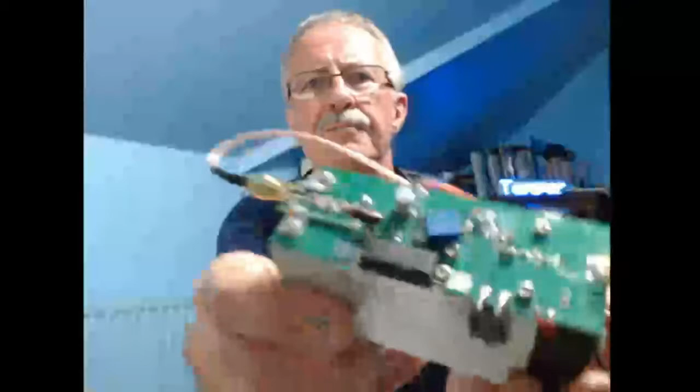Okay, that's about it from the radio point of view, but I would say I've grown some chilies this year that are weapons grade hot. If any of the listeners or viewers would like some, they're called Peach Ghost Jammy. They're a cross, round about 1 million Scoville units. They are insanely hot. I've only used 3 in a big batch of chutney, and it's hot stuff. But if anybody would like one or more, I've got several that I'm never going to use, so shout and message me on the forum, or otherwise private message if you'd like some of those, and I'll pop some in the post.

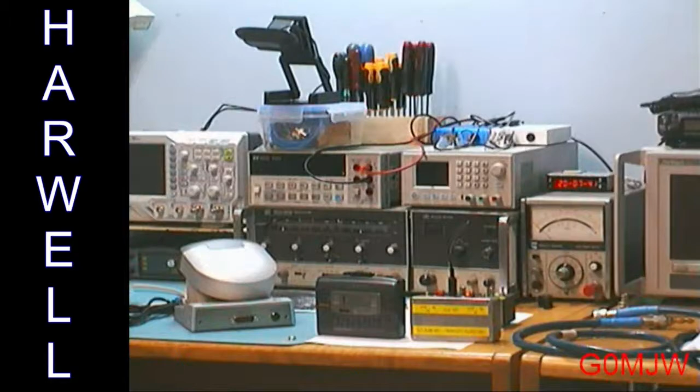Instead of sitting on top of the great big thing that it sat on top of, I guess you can see it panning and tilting and zooming here. And there's the second one. I've got 2 of them.

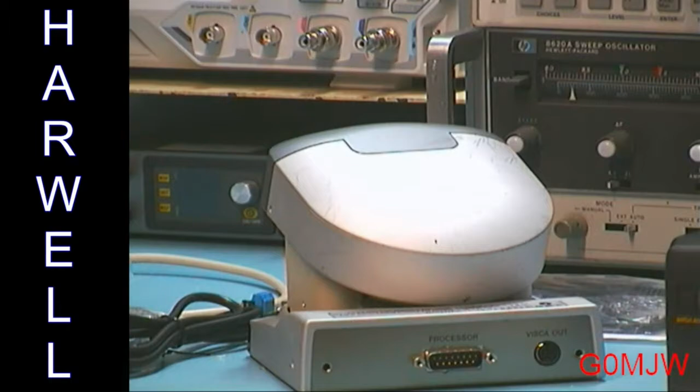This is the Sony camera. The one that is actually looking at that, the second one, is just the same, and it's running off a simple RS-232 connection.

Yeah, I care about the lack of lip sync now. I'll have a go at that in a minute. It's because I've been messing around with things, so sorry about that. But it won't be that bad, at least I hope not. It does depend on what receiver you're looking at it though. So I'll just look at it myself.

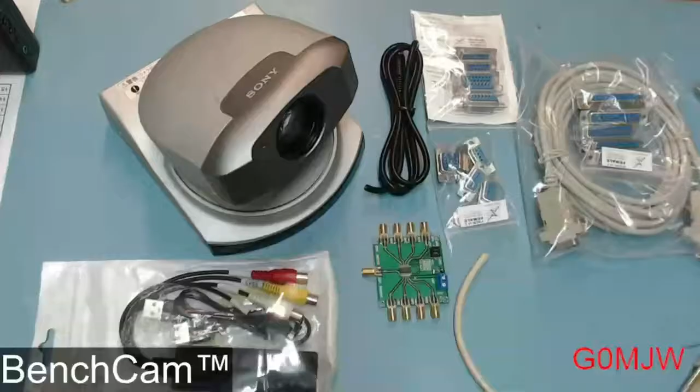I hope not. It does depend on what receiver you're looking at it though. So I'll just look at it myself. Yeah, it is quite a long way out, so I'll restart the thing that generates it. Anyway, never mind that. Because I'm going to show you a picture of the bench, which doesn't have anyone talking on it, so you won't be able to tell that I'm out of sync.

So what's on the bench at the moment? There's the camera that I just spoke about, and the various bits to make it work, which includes an EasyCap. This is not Portsdown compatible yet, but it works fine in Windows. There's an S video lead, an RS-232 interface cable, and a 9-way D-type female, and that's all you need. There are no electronic components required. It really is just a cable and an RS-232 connection, which in this case is my computer.

But it could be something like an Arduino or a Nextion or something else. And the software—I was going to write some software, but then discovered that there's some free software available, which is pretty good stuff actually.

So let me just go back to out of sync me for a moment. And have I got this? No, actually I haven't got it set up, so I can't do that. But I've got a little app which allows me to do all this moving about of the camera.

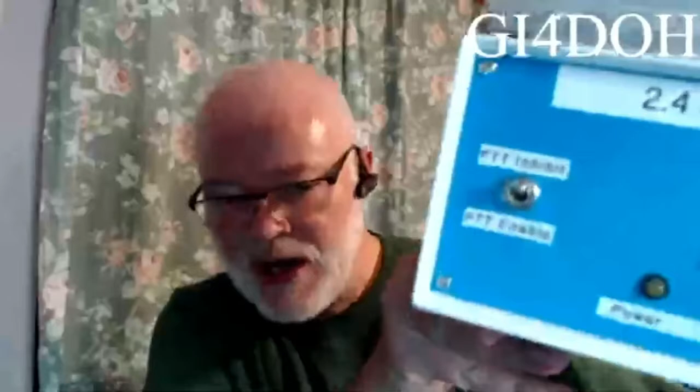Yeah, just trying out, as I talked about, the idea that was suggested to me before about putting a little switch on the front of the amplifier. Is it going to show? Yeah, it just inhibits the PTT until such time as I'm ready to go, so I don't have to click on the start streaming. And I think I comment there about low audio.

Just see if I can bring that, if that's a bit better. Not sure why that should have changed from last week unless I clicked and dragged. That is the other amplifier, not the one that I'm using, but the current one is like it. Just a little toggle switch to inhibit the PTT until I'm ready to go, and then I don't have that little lag before I see myself come up on the screen.

Okay, James, I think I may have accidentally dragged the slider down. I don't think anything should have changed from last week. So that wasn't a major task on either of those.

Indeed, having done the first one, the second one took next to no time at all. Just drilling holes in the front cover without taking everything off and making sure I didn't get any swarf inside was the hardest thing about that. I think just being very careful about hitting the switch and the wire inside. Apart from that, not a lot else.

I've spent a lot of time on eBay. I haven't actually bought a lot, but you know what it's like trying to find things.

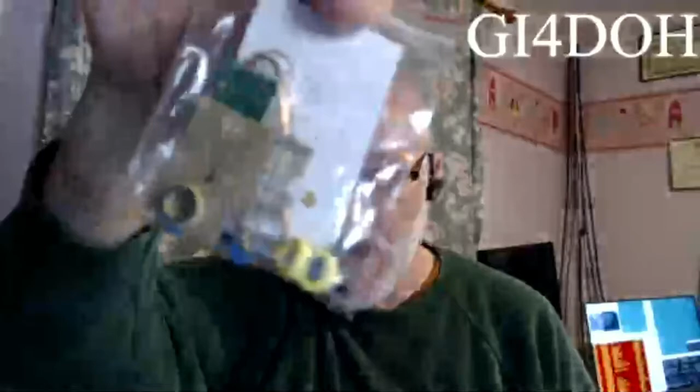Following on from the 10-meter transverter and amplification thereof, I took a look at QRP kits and found they had a little 10-watt linear amplifier, so that's something for me to do on a rainy day. I also went for their 10-meter low-pass filter kit, so that should give me a bit more power out and should be able to drive the big cheap Italian 600-watt trolley if it works, after I get the new transistor I've ordered for that. We'll see how that goes.

Yeah, the Cat 21 thing, got the date in my diary for that, and the activity weekend. I need to see what I can do for that. I still haven't packaged the Portsdown or the Lime as yet.

I have a couple of Hammond boxes on order from RS that should arrive tomorrow, and I'll start putting one of those in. I think I was waiting for the breakout board for the Portsdown for the GPIO boards, but I might just order the ordinary one as it can be modified to do what I want on the other bits, and just get that into a box suitable for going out portable. So enough for me for one round.

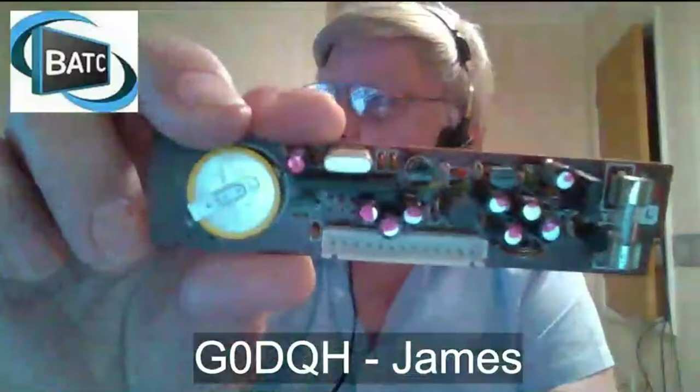Not much to talk about tonight. I've been busy working on the FT290, replacing capacitors on the power supply board, and I've managed, as you can see, to put little spots of red paint on the ones I've actually replaced. Otherwise I wouldn't know where I was coming or going. I can tell you there's so many capacitors in this beast, it's not true.

One of the things I did notice was, if I turn the board carefully around there, when I get it right, along the top on the connector there were loads of cracked solder joints. So that's something to be aware of, I think.

I've also replaced the memory battery as well, and put some of the caps in the receiver itself, but I can't honestly say it's any different at the moment. Some, but we'll get in there, I hope.

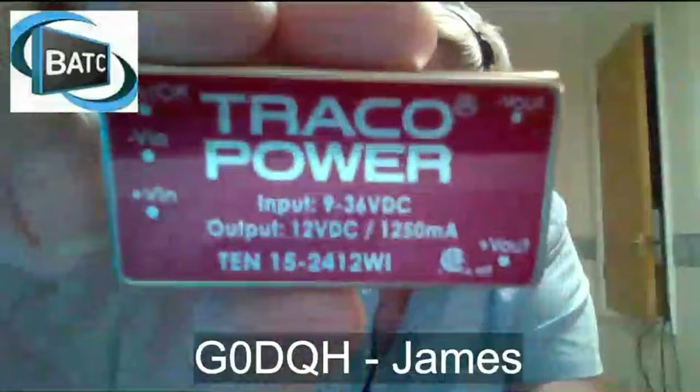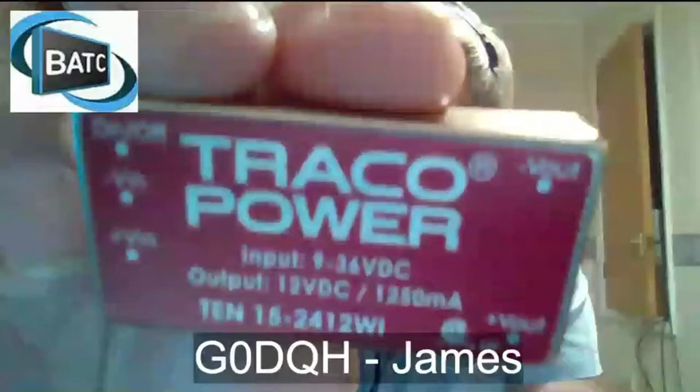The other thing is, if anybody wants any, I still have loads of these. They're not new, but I guarantee they're perfect: 9 to 36 volts in, output 12 volts DC at 1¼ amps. I've got one down in the garage supplying the bias supply voltage to my TX. They're £150 each, by the way, new. I'll put my email address on the web page in a minute, and if anybody wants some, I've got quite a few of them.

Temperature in the garage at the moment, by the way, is 20.7, and on the PA itself 20.8. So it runs beautifully cool with all the fans going. Okay, that's about it from me.

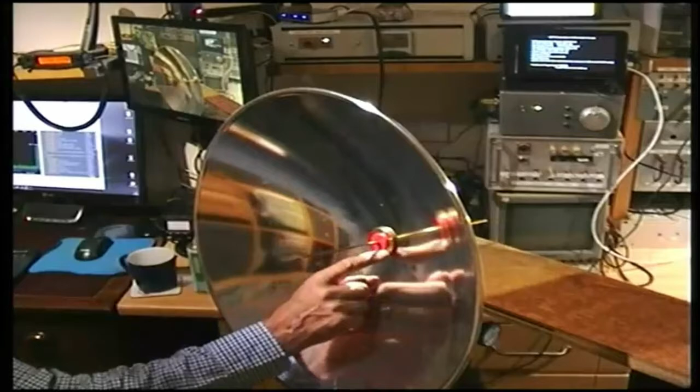Gareth 3D printed me this boss and a mount that you'll see shortly. It's got a 4mm tube drilled through the middle. This tube is 4mm OD, 2mm inside diameter, which on 122 gigs is a waveguide. The idea is I'm going to put a splash plate on the end of some form or other to illuminate the dish, and there's a bit of debate going on.

And cut this off, and it will go that way. Concave rather than convex, so that will be supported like that. Yes, it's one of these cameras, Mike.

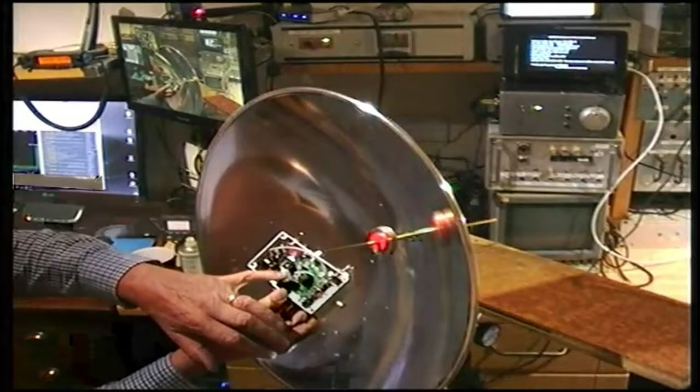Now the bit where Gareth needs to close his eyes is because this is the transverter that goes on the back, and you can see the mount here where the tube goes into. That's the aerial socket, old man. Unfortunately, Gareth did this wonderful 3D printing job for me, but what I forgot was that I've got sockets on both sides of the transverter. So the transverter will then sit in there like that.

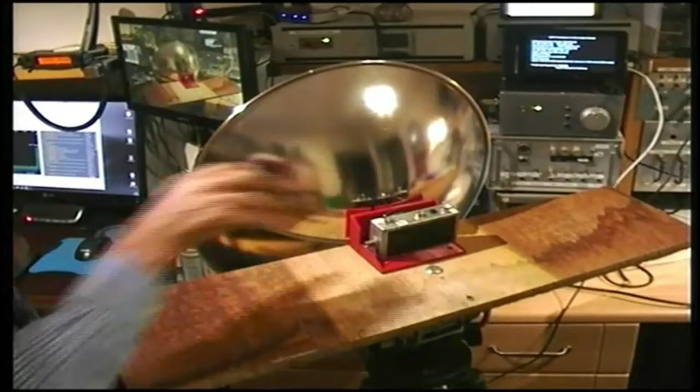And then the tube will go in, and that's the idea. The piece of wood needs cutting down, I know, but I've got to leave room for the Langstone and also a telescope on the other side. So that's it, that's really the only radio I've been doing.

But we've worked 17 kilometres so far on these little devices. They're car collision avoidance radars, and as I say, we've done 17k, and we hope to push it a bit more with the new dish. So thank you, Gareth, and apologies. So there we are, right, that goes in there, something like that. Don't worry about it. Okay, I think that's me.

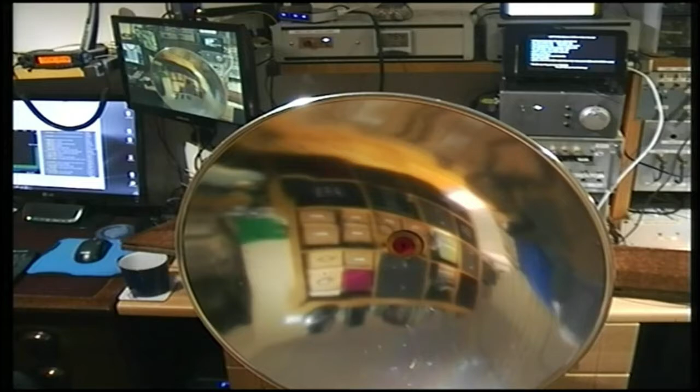Yeah, I've been learning the procedures really. I had the PA running the wrong way in a sense - the PA by the dish is powered, and the driver amp up here is powered, but the pulse down wasn't. So now I've reversed it, and the TX will stay on, and I'll just power the driver amp in the office here, or shack, and off we go.

Yeah, there you go. Oh my word! What's that? Bit of just learning the procedures really. That's better. Good. Okie doke.

Well, just to Gareth, great to hear about the chilies. My dear wife grows them for me - she hates spicy food, but she grows them for me. I haven't heard of that variety before, so we'll have to chat about getting some seeds, or drying some out and planting some. I enjoy the spicy food, and some do, some don't.

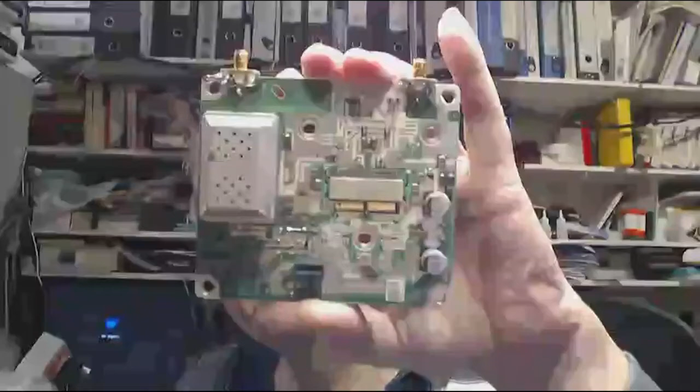With respect to what Jim was saying, not the last net but the one before it, I think we talked about these amplifiers, and I managed to get a couple in from our friends in Poland at Bison, and managed to get the connectors either side, and put these on with the help of G4 CPE's large iron.

I took them off on a hot plate, which I borrowed from next door, and with the aid of a thermocouple meter, I was able to get it up to, well, just over 200 degrees - as much as I could hold the probe onto the hot plate. Even 2 inches above the hot plate, 200 degrees feels a tad hot.

And if you're not careful, you can press a little too hard to get a good connection with the thermocouple, and the thing collapses in your hand, then descends rapidly towards a 200 degree heated surface, which is not good. I managed not to do that, but I did manage to fold over the end of the thermocouple. There must be some scheme for holding a thermocouple in a rigid form to avoid burning yourself, but I'm sure someone with more experience than me will comment on that down the track.

And yes, okay, to Roger - looking forward to your workshop tour. I'm an aspiring engineer who isn't, and he's unlikely to if you saw what was in my garage, which is just chock-a-block with rubbish, and all the rally gear for the Dunstable Downs Radio Club rally, which hopefully will run next year. There you go.

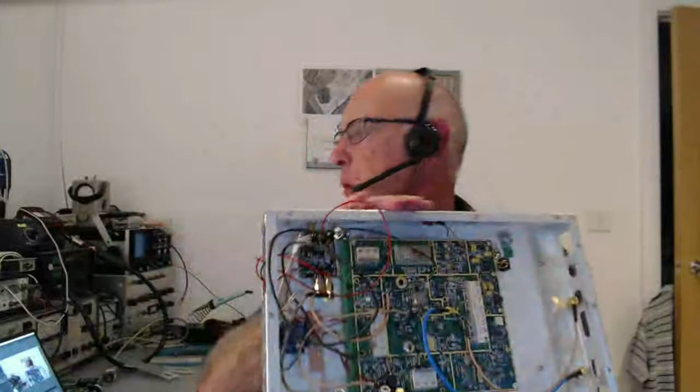But the 122 gig stuff looks really good, and it's shiny. Marvellous. Okay, so what we've been doing here is 3.4 gigs. You'll have seen this for the last couple of weeks, you'll be getting bored with it, I think.

But I've been working on the receive side this week, and it now works with about a 5 dB noise figure on receive. The one thing I did have to put in, it uses an ADF 4351 down here to generate the local oscillator on about 3 gigs. I had to put in a bandpass filter for the local oscillator, as the ADF 4351 was just putting a lot of broadband noise into the mixer, probably at the IF frequency. So that's a 3 gig bandpass filter, and that made a world of difference to the noise figure.

For a closer look at the board, that's the fella. The transmit on the left hand side and the receive on the right, and the diplexing filters in the middle there. So that's what we've been up to. No more radio for another week, and then she'll be back the week after next.

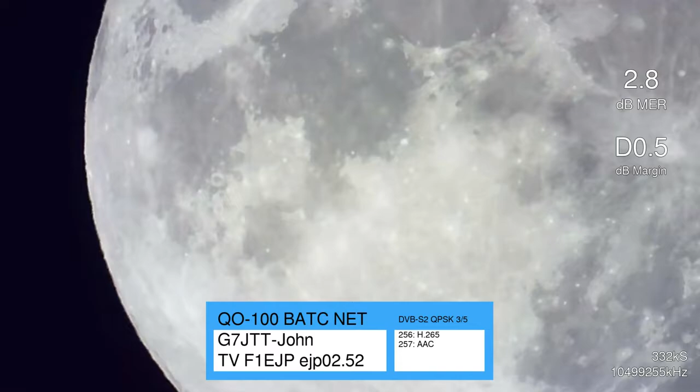Is that going to work? Fingers crossed. Oh, right. Good evening all. Let me just get rid of this audio so I don't confuse myself. Firstly, yes, literally just through the door, so yeah, I may slur, it's not anything else, I'm just very, very tired. It's been a very, very long, painful week. So anyway, that aside, so what have I been up to?

I actually managed, as you can see in the background, only the third time I've actually managed to use my new telescope for what it was actually bought for, and that is the moon, captured via my telescope using...

Actually, this is really quite neat. Actually, a cheapo webcam, so just an ordinary webcam, which... so just a cheapo ordinary type. That's not going to play, is it? Let me just get, I've got that as well.

Right, turn that off for a minute. So just an ordinary cheap webcam, and most of these webcams have little lenses on the front of them which screw into the appropriate bit. And if you look on that one, there's a little ridge on it, so that ridge would be on the inside, which would stop you from actually unscrewing it completely. But when you take it off, you can unscrew that, and what you're left with, if this will go into it - no, it won't - but anyway, you're left with a cylinder which is actually threaded.

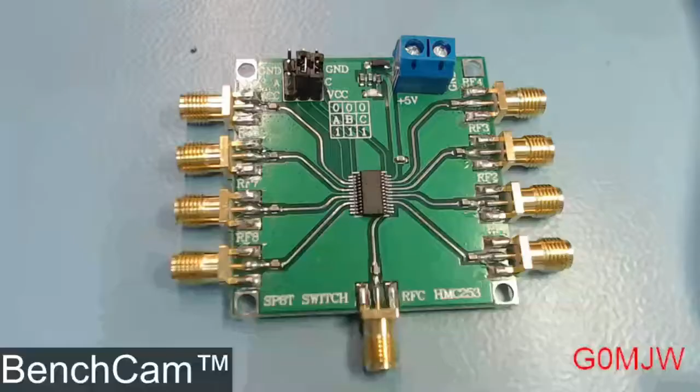The only thing I did want to show is this, which is the 8-way switch that comes from AliExpress or eBay. So this particular version of it, if you look at it carefully, you will see that the lines going to the SMAs are nowhere near 50 ohms. That's just 1.6 millimeter thick FR4, so probably more like 100 ohms. So I tested it anyway, and the isolation is fine within spec of the chip, but the loss is quite high.

Below a gigahertz, so up to 70 cms there's about 1.2 to 1.5 dB loss, which is fine. Then at 1 gigahertz it goes up to about 3 dB loss, and at 2.4 it's about 6. So they're fine as long as you don't want to use them on the microwave bands, and I'm sure that's just because of the matching to the board. They cost about £20 delivered, and the chip is £18, so good deal, I think.

Right, okay. Was there anything else? Yeah, no, I don't think so.

But looking forward to seeing what else Richard's been up to, and also to hear all about this CNC, because that's one thing I'd really like to do, but I've never got around to do.

So my idea of CNC is me twiddling the thing around backwards and forwards, and generally it works. You turn it one way to make the milling cutter go one way and the other way to make it go the other way, backwards and forwards, and at some point you turn it the wrong way and ruin the job. So CNC is the way to go.

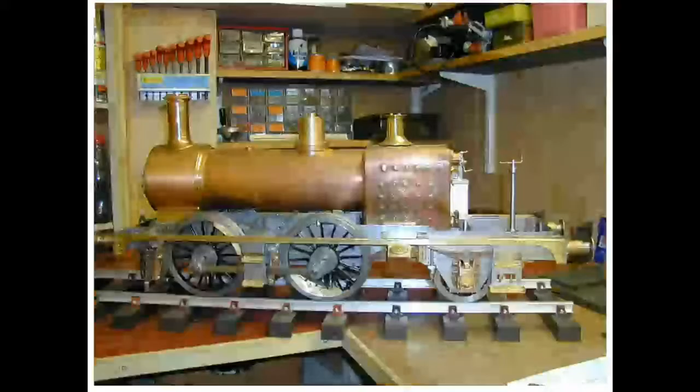So the 1400 is still sitting on the bench, more or less like that, because I became quite distracted. There it is again, and close up. The family keep insisting that I finish it. I really must get round to it. It's not as shiny now after 20 years.

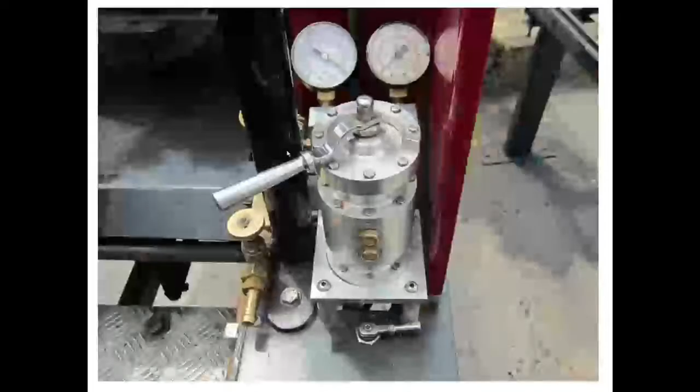Anyway, the new railway we built at the showground was passenger hauling. That was the loco I built, 7¼ gauge, and the water crane I built at home for the railway. That was capable of carrying 1,000 passengers a day on that railway for about a third of a mile around the showground. It included things like air and vacuum pumps. That was the control for that I designed and built and added to the loco. That was the steam-driven air pump, sort of jolly things to add and a bit more brass to polish.

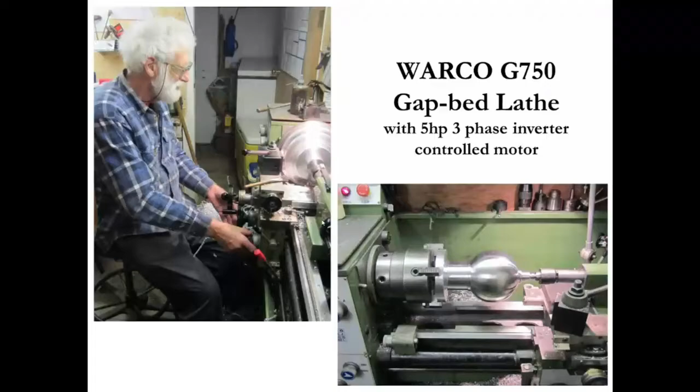But to convert it to CNC, the first thing you have to do is get rid of all the axis drives, because they're on Acme thread or square threads of one sort or another, and the big problem is the backlash that you inevitably get with that. So you have to fit ball screws with the appropriate nuts, with all the ball bearings that run inside them - 32 of them, you'll discover, if you accidentally let them out, and they are not easy to get back in. Anyway, there we are, the voice of experience.

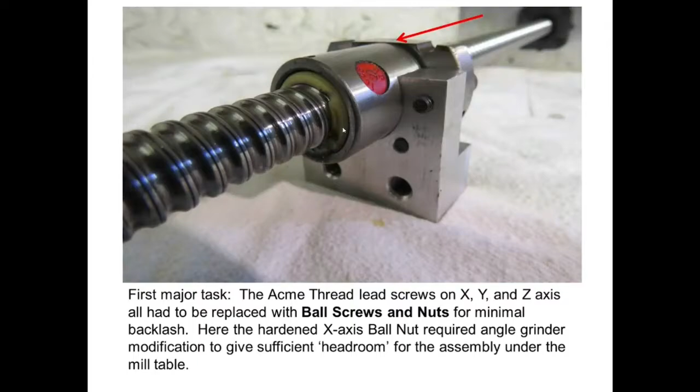So those have to be fitted on all three axes, and they are driven by stepper motors rather than the hand controls. I left the hand controls on, as I got double-ended stepper motors, because that gives you a bit of flexibility when you're in a hurry and you haven't got the computer switched on.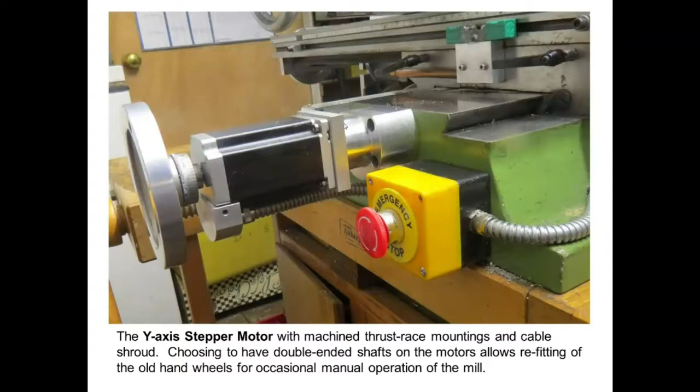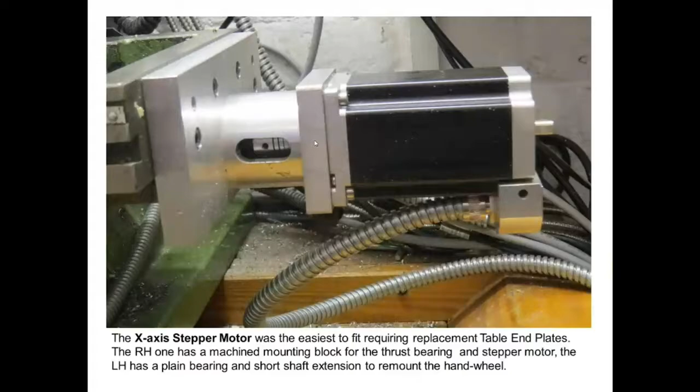That's underneath - just showing you underneath the thing, and there's the ball screw and the ball screw nut driven by the stepper. That's on the X-axis. The X-axis goes left, right. The Y-axis goes back and forward, away from the operator, as it were. And the Z-axis, of course, is up and down.

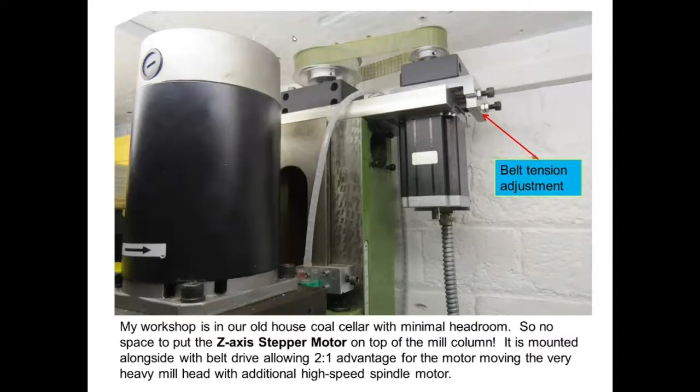Now, I'm in an old listed Victorian terrace here, and we're down in the coal cellar, which my wife and I dug out - the old brick and earth - when we were a little bit younger, when we first came here. We dug it all out, put in insulation and some heating, and it makes a very good workshop, except there's no headroom. As you can see, the ceiling is just there, no room for a stepper motor, so I had to do this adaptation to get the thing in. Otherwise, there would have been a hole through the ceiling, through the floor above, and I don't think my wife would have appreciated the top end of the milling machine under the dining room table.

Other things one has to add for safety are proximity switches, limit switches, because anyone who's ever got into CNC knows that sooner or later the thing will take over with a mind of its own, and if you haven't got limit switches, you have a lot of mangled and expensive machinery. So absolutely vital - limit switches on all axes.

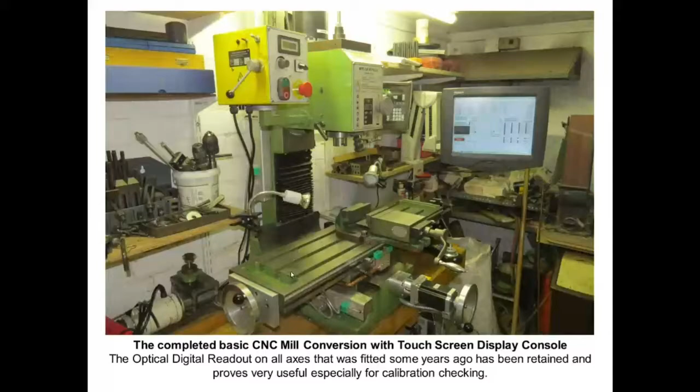So this is the general view of it with the stepper motor. That's the Y-axis, Z-axis up here somewhere, and the X just down the end there. Computer is an old desktop, running, I think, Windows 10 now - it was running Windows 7. It's running Windows 10 now, I think. And the touch screen...

...display here for controlling all the various parameters and so forth that you need with CNC. I've also still got a digital readout. I put that on before I converted it to CNC, so it's very useful, sort of belt and braces, for accurate readouts.

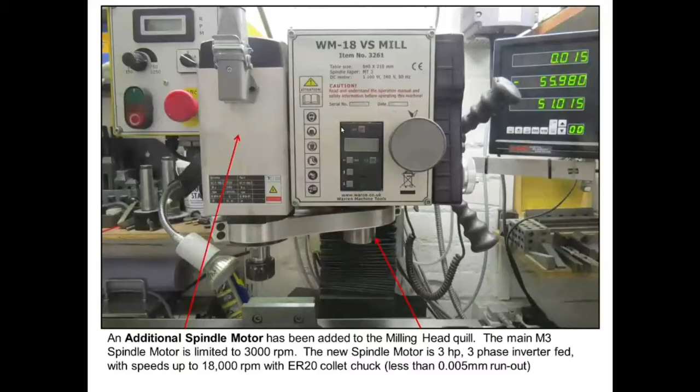Then I added - now, one of the things I was particularly interested in was milling circuit boards, obviously for radio. One of the problems with a standard mill is you can't drive the cutters fast enough. The smaller your cutter, the faster it has to go, and the top speed on the mill as supplied is about 3,000 RPM, which is no use at all. You need about 18,000 RPM to do the very fine cutting.

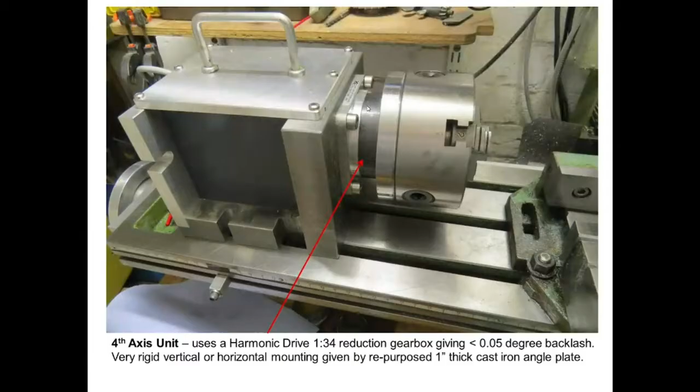So I also added a fourth axis, and I'm going through this fairly quickly because I don't want to keep you all on too long - I'm just watching my PA temperature as well.

This is the interface, so the computer running Mach 3. All the design is done on Fusion 360, which I also use for 3D printing design. That goes into this interface, which then goes out to drive the stepper motors.

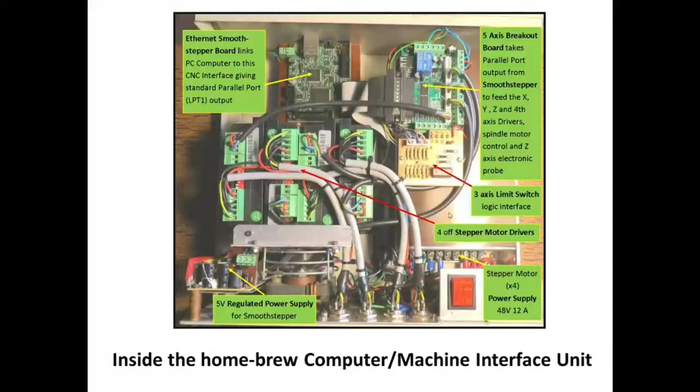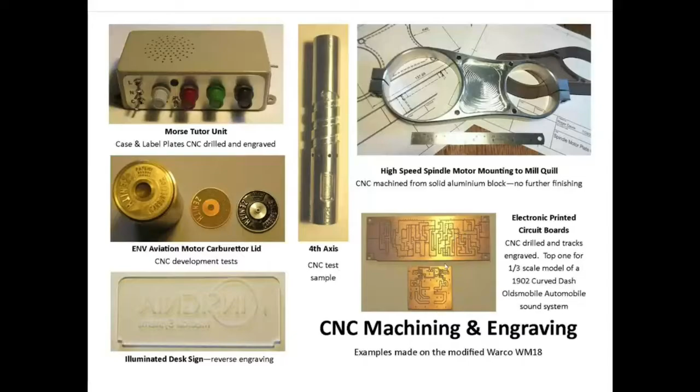Fourth axis testing piece. This is the bracket that holds the high-speed motor on. Here are some printed circuit boards that have been milled, illuminated desk signs and so forth. That was milled out of a solid lump of aluminium, and that's as it came off the machine, so you can see the sort of finish you get.

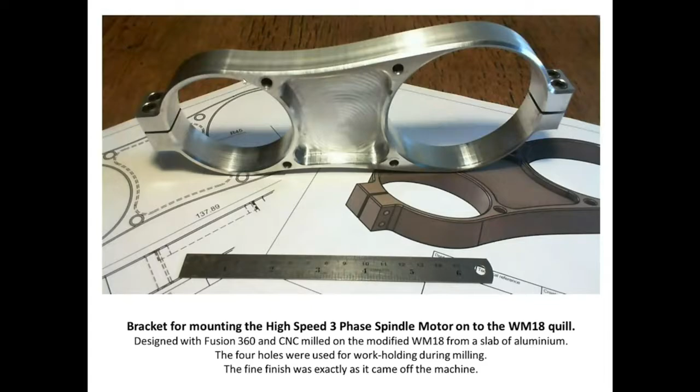So this was the circuit board for the driver for my mag loop, LF mag loop. Illuminated signs, that was one for my son. He is a software engineer for medical imaging.

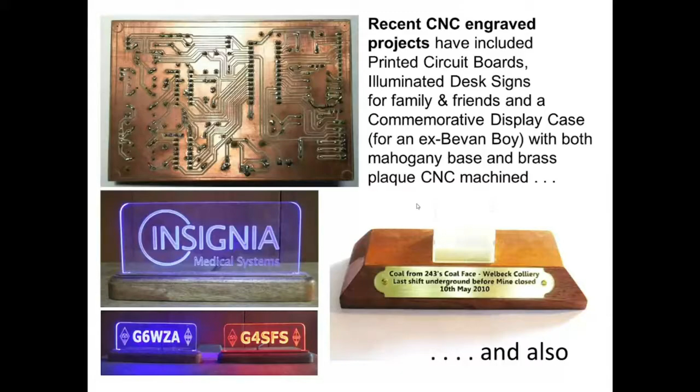Signs for some of my friends locally for their call signs. Some engraving here for a dear old chap in our club who was a Bevan Boy down the mines during the war, and I had a sample of the last bit of coal that came out of his old pit. This was something I was very proud of, to make the top for the carburettor of this beautiful half-scale aero engine, a 1909 ENV.

There are only 3 left in the world, 3 or 4, all in bits, one in the reserve collection of the Science Museum.

Stephen, who's an absolutely amazing engineer, from a few drawings and photographs he was allowed to take in a half-hour visit to the museum, asked me to make the top for his Zenith carburettor, which he'd made, and that was all CNC milled out. Took 34,000 lines of G-code with a 0.3 millimeter diameter cutter in order to get this extremely fine numbering, about 2 millimeters high.

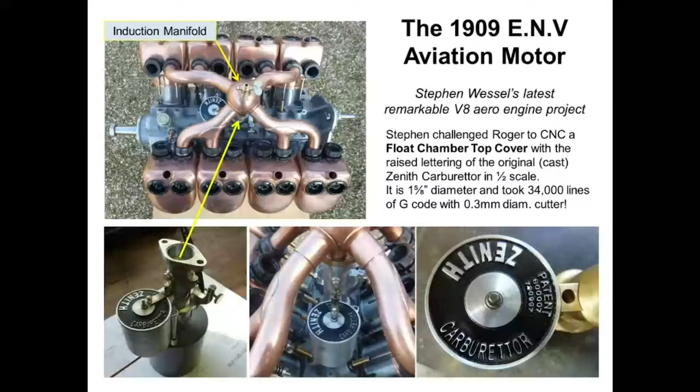The other major thing you might be interested to see was the Wren Turbojet project that another friend wanted done. There was a piece in that he couldn't make.

This is a section through it. Compressor. These are the combustion chambers. That's the turbine and the jet out. But he needed the thing in the middle called the diffuser.

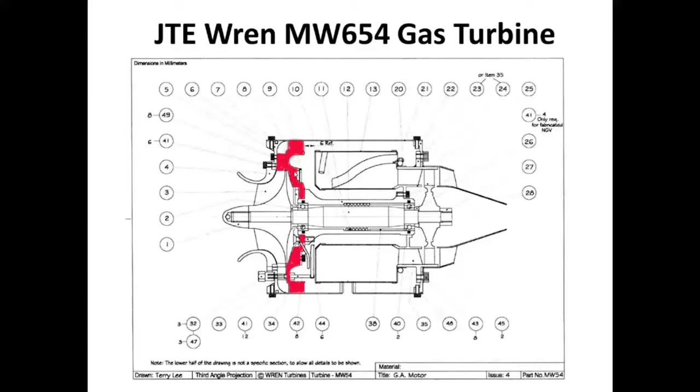These are the drawings for it, which I then had to convert to CAD with Fusion 360 and devise ways of making these blades in aerofoil section, which took quite a bit of messing about, which was good for the old grey matter. And these are the final programming, this in Fusion 360.

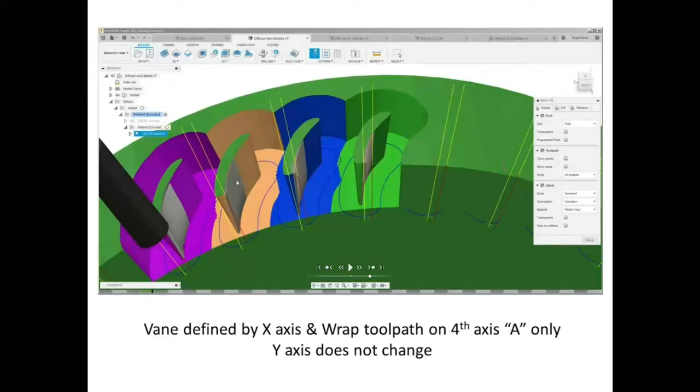Here's the lump of special alloy that I had to machine. And hopefully, here is some of the result, having proved the process and refined it somewhat. This is the actual cutting, having proved the process and refined it.

Sorry about that, some soundtrack got on there. Anyway, this is the machine in progress on the 4th axis.

Gives you some idea. Once you've got the hang of it, I still find myself fascinated by what has been achieved.

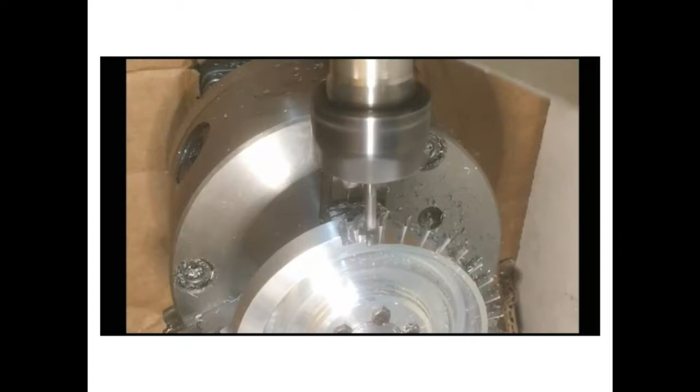If there are any professional machinists watching, yes, I know it's all very conservatively done, but the 2 pieces of alloy that the friend who wanted this done for him supplied me with were not easy to replace, and I certainly didn't want to have to go back to him and say, go and buy some more. So the milling is done on a fairly conservative basis in terms of depths of cut and so on, but I think you can get an idea of this fascinating process.

Well, all I could say is truly staggered to see that. I could see why you've had 20 years in retirement. Yeah, quite staggered. I don't know quite whether professional engineers would take bigger depths of cut with that rotor there, or impeller. I'm not sure what you call it, but absolutely fascinating.

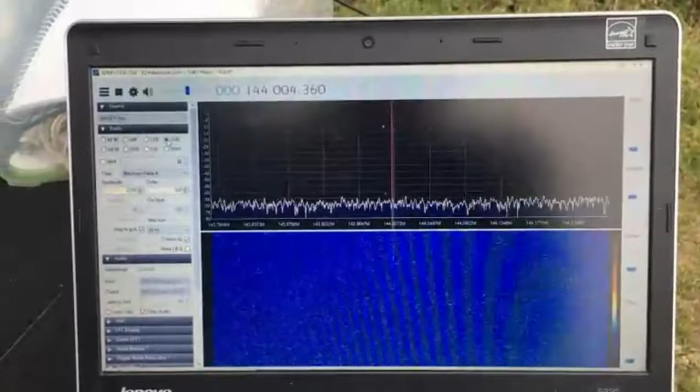So that was 17k, and yes it drifted a bit, but very readable. I think this is just more of the same.

So there we go. So that was 17k on 122 gigs. No idea what the being sent. In fact I do, because the VK units are pre-programmed, and we both agreed what we were going to pre-program in the units. And Dave just about copies CW, so he would know what was being sent, but I have no idea what he was sending me.

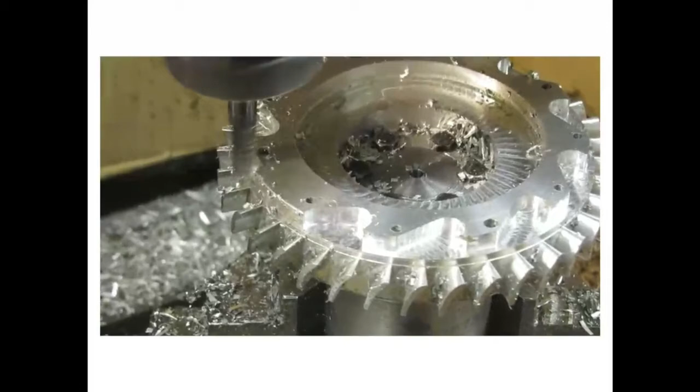This is called in CNC speak adaptive clearing, which is an extremely efficient way - it's all worked out by the software. Fusion 360, as I said, is what I use, and this runs the machine completely under software control. The depth of cut and the speed of the cut are all being controlled and changing all the time, so the cutter is taking the optimum amount of metal for its diameter, speed, and the metal being cut. It's a fascinating world.

Although this is just an amateur attempt at it, once you've got the hang of it, or part of the hang of it, one can watch this quite often. I can't believe I got away with it - that's the best summary. But the further you get, the more metal you've cut, the more anxious you get, because it's only got to go wrong once, and the scrap bin is the only place.

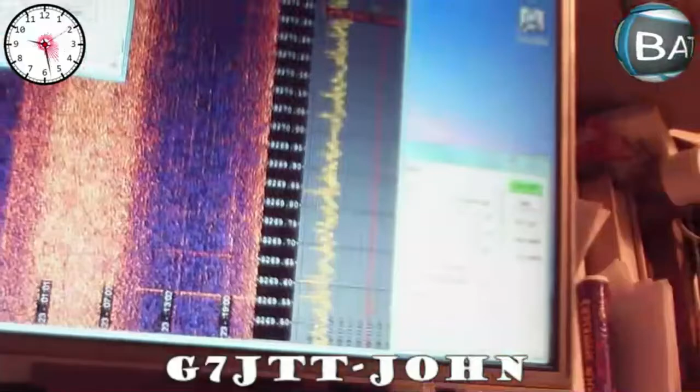As Al says, recent times - what you can see down the bottom there are three test signals, one at minus 90, minus 95, and minus 100 dB. It's quite an interesting thing that through the night it's the noisiest at 8 kilohertz. So you'll see there the brighter area is through the night basically, and then through the day it goes very quiet.

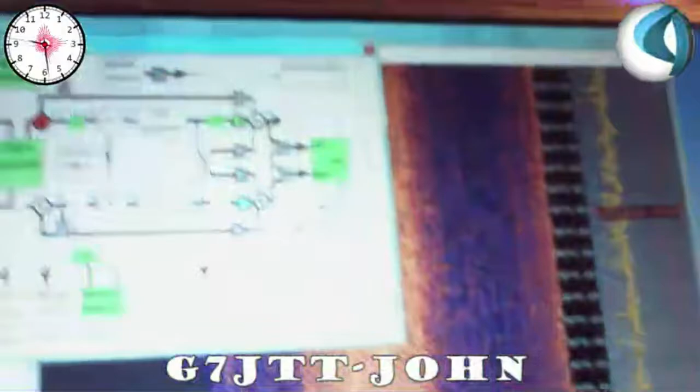So actually it works a lot better during the day than it is through the night. I'm guessing, as I'm fairly new at all this, that distances are probably limited by that. Just because it's quite nice and neat to look at, that's the background engine of Spectrum Lab - we're using both channels. One is just doing the calibrating stuff and locking onto everything, and the other one's got filters and God knows what else in there to try and render out all the noise.

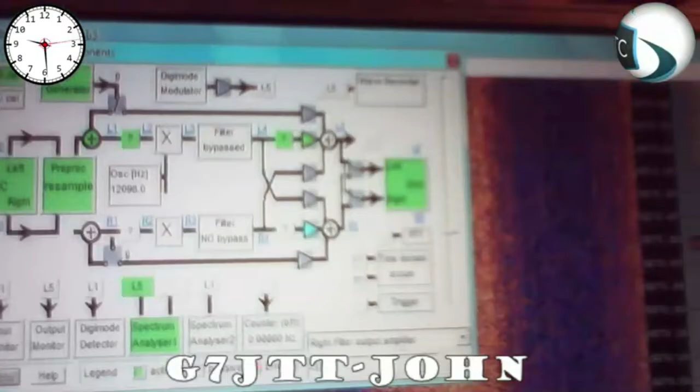I can probably show you - that's the actual device there, and if I turn that up, I don't know how well this is going to work, we'll give it a go. But that, where am I there? That's the filtered audio.

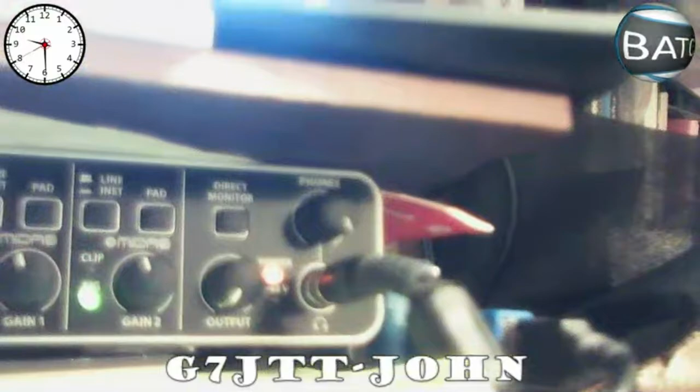That's the unfiltered audio, so yeah, massive difference using all the filters and stuff like that. But wires connecting on where they shouldn't be connecting now. So that was that. What was the other thing I was going to show? Oh, let me just get rid of this camera, get rid of the wobbly cam.

You talk about Sharp, etc. One of the pieces of software, which I don't know if anybody's really used yet, is this one. I'll just make it full screen to make it worthwhile seeing. This is SDR++. It's an absolute brilliant piece of software, pure basics. That's looking at our, or my, signal at the moment. It's bloat free, so it's as basic as a piece of software can be.

It's a bit like GQRX in the sense that it's really basic, but it's cross-platform. You can run it on Raspberry Pi, you can run it on Windows, which I'm obviously doing at the moment, Linux, and I think you can even run it on a Mac as well. The young chap that's done it has done an absolutely brilliant job on it, and it's got support for just about every SDR that I can think of. At the moment I'm just using it on an RTL dongle.

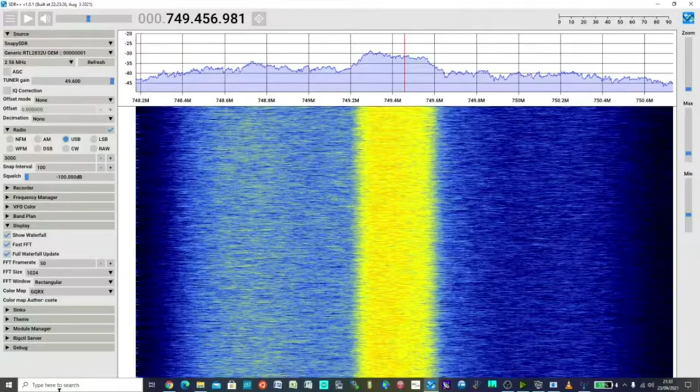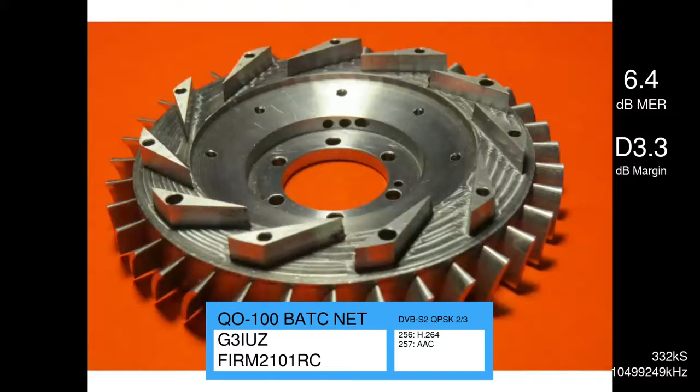Just in case I forgot to show you the finished job, there's the finished job. Sorry about that, there we are. That's what the guy got.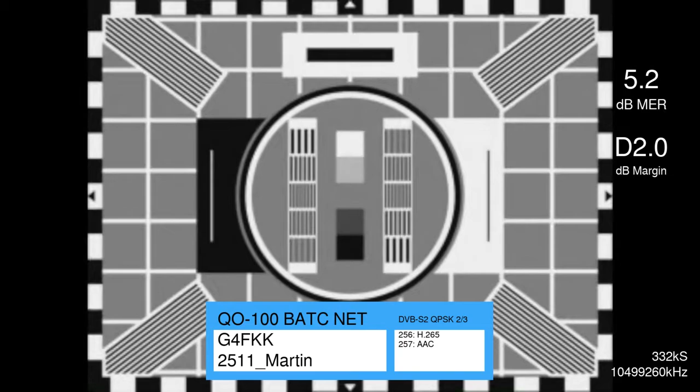Right, sorry, I wasn't sure I was coming back actually. Yeah, Roger, that was absolutely brilliant, and it just shows you what you can do as an amateur, well, at least what you can do as an amateur. Thank you very much for sharing that with us, that was absolutely brilliant. And John, yeah, very interested in the VLF as well. I'd not heard of SDR++, so that's another thing to get going.